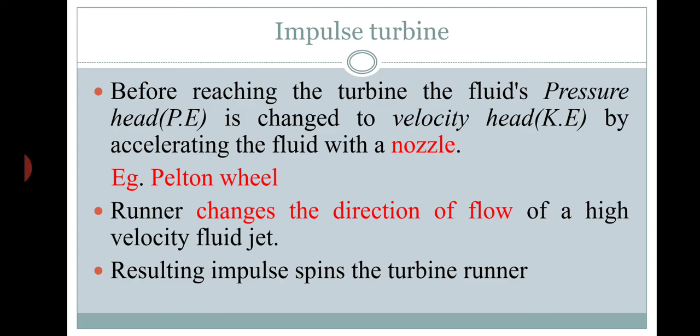And at a maximum kinetic energy, your fluid will be striking on the rotor. So the rotor or the runner design will be such to accommodate that high impulse force. Here the runner definitely changes the direction of flow of that high velocity fluid jet, and that will result in your runner rotating. So to explain the working, we can just refer to this figure.

So here you can see that you are having a penstock at the left side where the water from the dam or the reservoir is flowing through the penstock. Incoming water will be through the penstock at very high velocity. That is the main point. And you are utilizing a nozzle, that is a diverging or a converging cross section of a nozzle, to convert your potential energy entirely into kinetic energy.

So your jet of water that is coming out of the nozzle will be at very high velocity or very high kinetic energy, and that high kinetic energy fluid will be striking over the runner. So here the runner will be designed with many buckets mounted over the runner. So as the high velocity water jet strikes, the bucket will be pushed backwards. That will rotate your runner, in turn your runner shaft. So that runner shaft will be connected to the generator for power generation.

Definitely you will be having a brake nozzle as shown at the top of the figure, where you can utilize again the incoming water or a bleed of water from the penstock to stop the runner rotation, to stop your turbine or power generation as well. So you will be having an incoming penstock, a nozzle, a runner mounted with buckets, and a brake nozzle, and all together you will be enclosed in a casing.

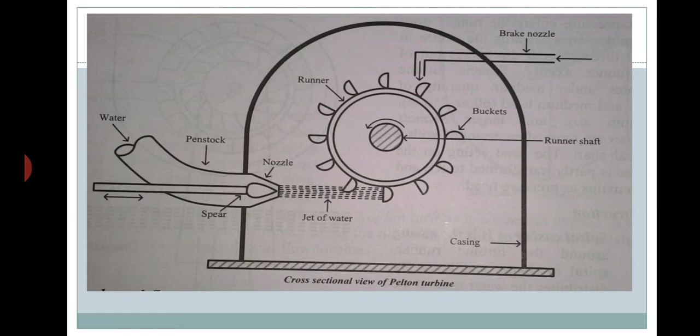So the casing design is also very important, where that particular casing has to withstand whatever forces are generated due to the falling water at high velocity. How you can control the rotation speed of your runner is through a spear valve inside the nozzle. You can see a spear headed valve inside a nozzle, so you can close the nozzle and open the nozzle accordingly, based on your requirement for power generation.

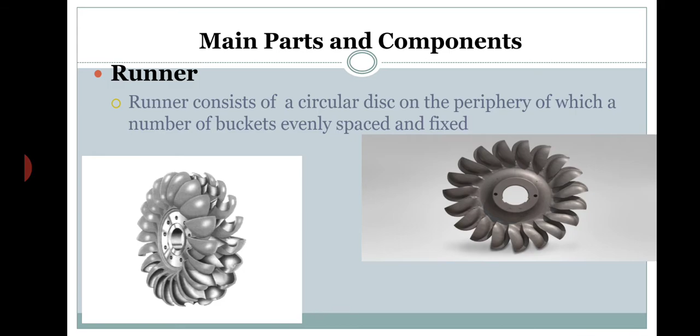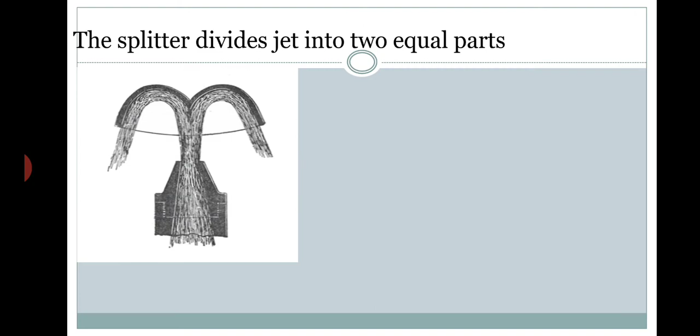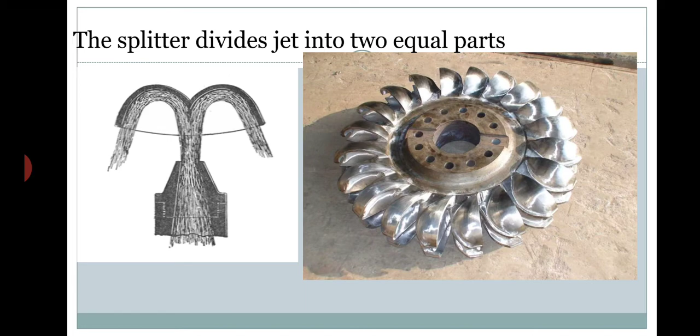So as we discussed, our main parts will be a runner, where you can see the figures for a runner, where over that particular rotor or runner you will be having buckets. So presently we are utilizing these types of double buckets with a splitter at the center, where that splitter will be utilized to divide your jet into two equal parts. You can see the first figure on the left side, where the incoming water will be split into two, and the water will be flowing outside the bucket. It's actually designed for better efficiency or better absorbing of energy from the striking water.

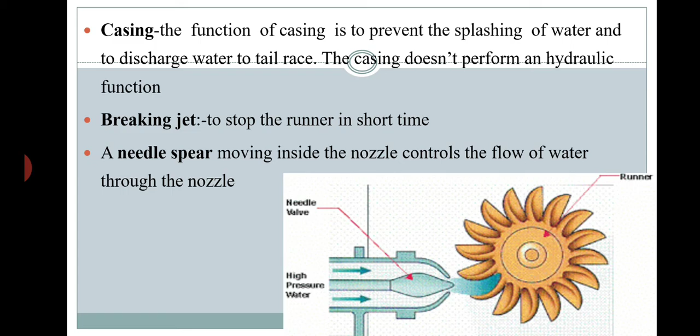And the other major components are like the casing that we discussed, which is to prevent the splashing of water and for proper discharge of water to the tail race. The outside exit area of the turbine is called the tail race. And you will be having a braking jet and the needle spear for properly controlling the flow of water through the jet. You can see in the figure shown here, you are having the needle valve and the runner.

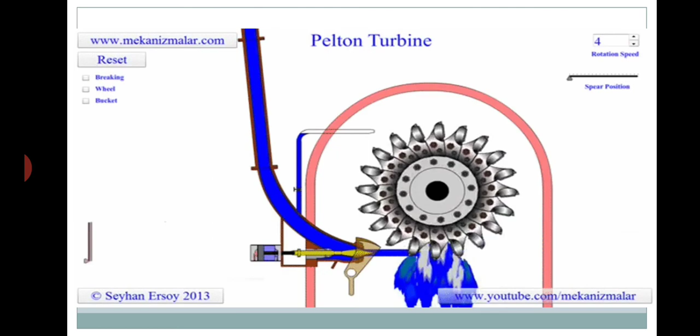Then a small animation to show the working. You can see the water coming out of the jet, and as the water hits the runner, you can see the rotation of the runner, and that runner rotation will be fed to the generator side. So like this you can utilize the fluid energy for energy production. So that's all about the basic working of a Pelton wheel.

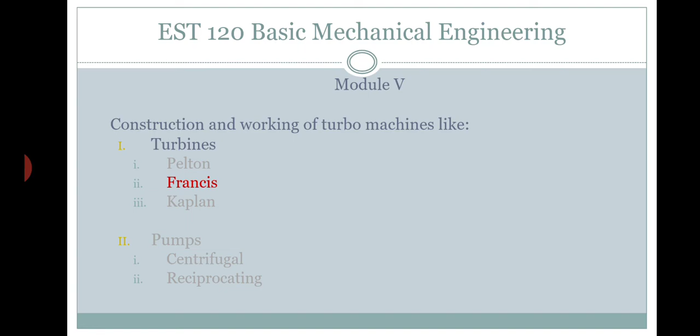And now in the later sessions we'll be discussing the working of reaction turbines in detail, like Francis and Kaplan. So thank you for now.